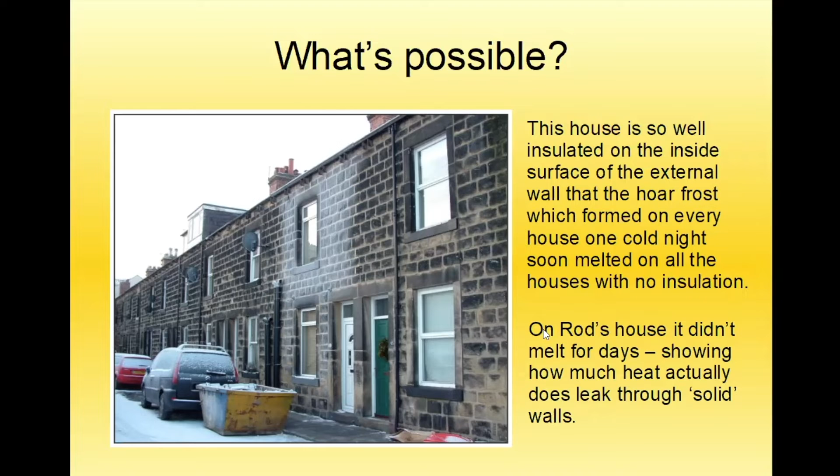Now, Rod's house is really quite special. I'm going to give you some things about it. It's warm and comfy all the year round. I remember going into his house one December, very cold. I said, oh, it's lovely in here. When did you last have the heating on, Rod? And you could see him thinking for a moment, oh, I think it was 3 days ago.

And he just doesn't need to heat it. It self-heats. He has a wood-burning stove, but he rarely puts it on. Doesn't need it. The house just stays warm.

All his lighting, he's converted to ultra-bright LEDs, and he supplies those from a battery, which charges from a small solar panel. In actual fact, the solar panel is on the north-facing part of his garden shed. And because it's amorphous silicon as opposed to monocrystalline silicon, it's still working in cloudy skies.

And this dominance of monocrystalline silicon is a puzzle. Here we are in cloudy northern Europe. Now this fellow had the gas turned off to his house 20 years ago. No gas bills. And he showed me his mains electricity bill for the whole of one year: £40.

Now I get very, very excited when I see this kind of thing. Imagine what we could do to fuel policy. Imagine what we could do to carbon emissions. And this is a 100-year-old house.

Okay, well, slight introduction of who I am, how I got here. Around 2008, I started a community group in that town actually - that's Otley, just north of Leeds - and it struck me that we needed a forum, we needed a place where we could talk about it and get people thinking, get people understanding what was possible.

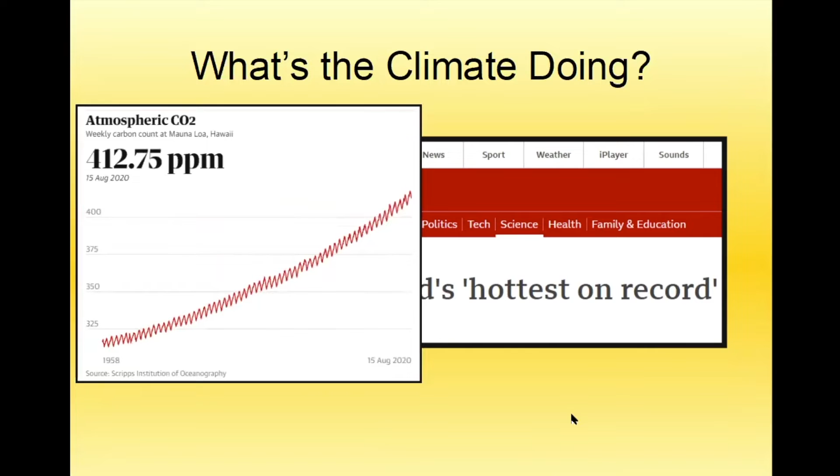So what's the climate doing? Well, it's getting hotter. September this year was the world's hottest ever. Atmospheric carbon is a key driver for that, and we can see a very close tracking of the global temperature rise. On the right-hand side of this image, the bar at the bottom represents the same time scale as the carbon dioxide graph on the left, and they're just tracking each other.

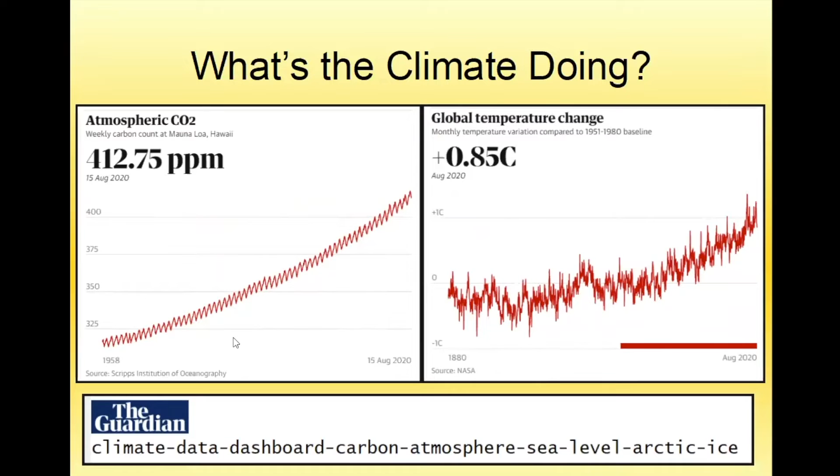This is where the data came from for those two graphs. We're all very familiar with a lot of the extreme weather events. This is one of the big drivers for doing this work, and it's one of the reasons that I'm so passionate about being involved with it all.

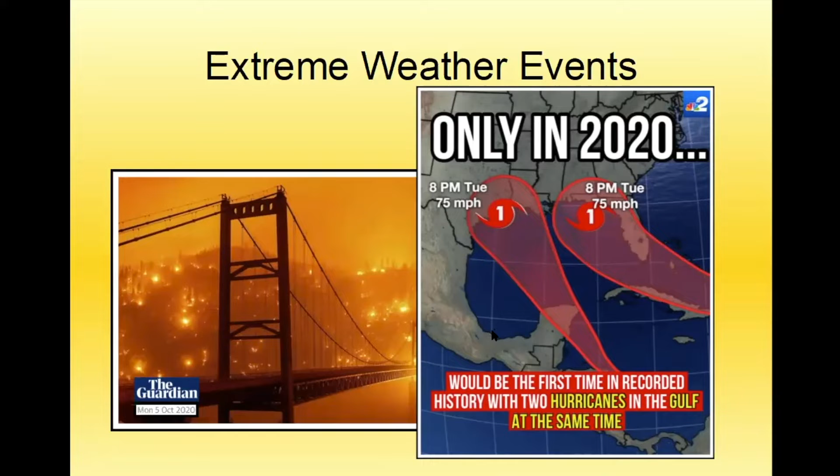Horrendous fires in California and Australia and many other places. This year, there were two hurricanes at the same time - that's never happened before, which is really kind of scary. But you don't have to go far. The Lake District has had huge amounts of rain, and it's just making a proper mess. In Yorkshire, we had a huge moor fire, and it destroyed a lot of natural countryside and wildlife. And then last August, there was a tornado.

So now I'm going to show you a little video.

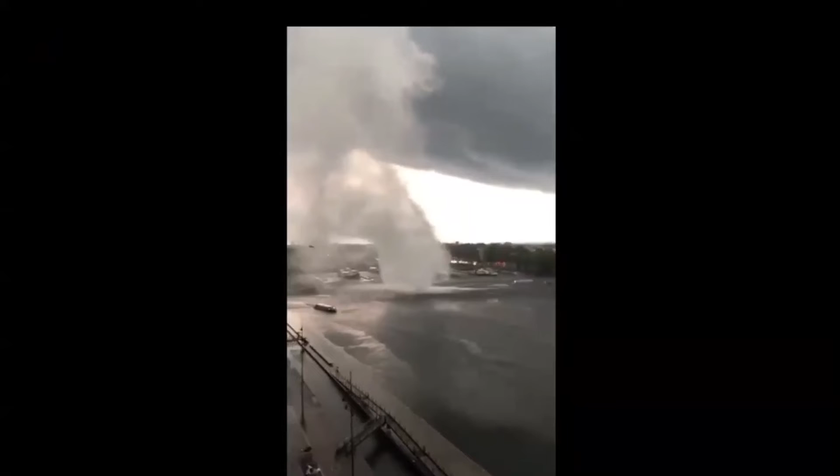I always thought that tornadoes happened in Texas or over there, not Amsterdam. That's getting a bit close, if you ask me.

Fuel poverty is a dreadful thing. I've been following this very closely, and there are different definitions of it, but essentially it's where households are below the poverty line and, within certain constraints, spending more than 10% of their remaining income on fuel. And of course, a lot of them are having to choose between eating or heating. This is a social scourge. So even with the best manipulated figures from the blessed UK government, that's 2.5 million households living in fuel poverty - more than 10% of the entire population.

This is 2020. When you start looking at older properties, it's actually 18% of the population in older properties. In private rented properties it's 21%, and astonishingly, lone parents with children have got the worst deal of all.

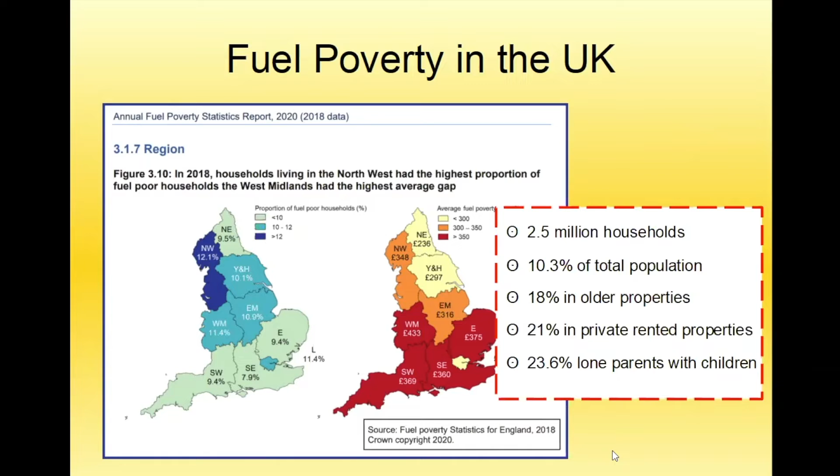What can be achieved? Well, here's a very rough graph of the amount of energy used for an average house. So I'm saying it's about 15,000 kilowatt hours for an average house, and that's gas and electric combined.

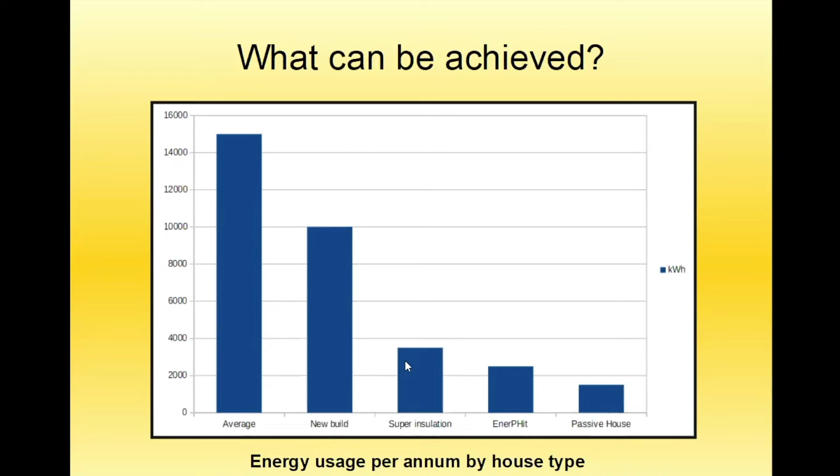Where would we like to be? Passive house, which I've pegged at one tenth of what the average is, so about 1,500 kilowatt hours for the year. A new build house, maybe 10,000 if you're lucky. These are just general figures. Super insulation, I feel you can comfortably get down to about here. EnerPHit is a standard similar to passive house with a few things relaxed. But this is the kind of step change that we need if we're going to make a big difference.

So insulating the UK housing stock, starting with local initiatives like in the Borders, what would it give us? Well, it would create tens of thousands of jobs. It would stimulate the whole manufacturing industry and the supply chain, improve the health and well-being of an awful lot of people, and that would reduce the burden on the NHS. And that can be quantified in terms of social return on investment.

It would build community involvement. It's a well-researched fact that if you put money into a neighbourhood, then everybody pulls their socks up a bit and starts to work together. If people aren't paying horrendous fuel bills, there's clearly more money to put into the local economy. Of course, it's going to reduce carbon emissions, and it's also going to improve the UK's fuel security.

80% of the gas we use now, I've read, is imported, and that's fine whilst Russia or Norway still want to sell it to us.

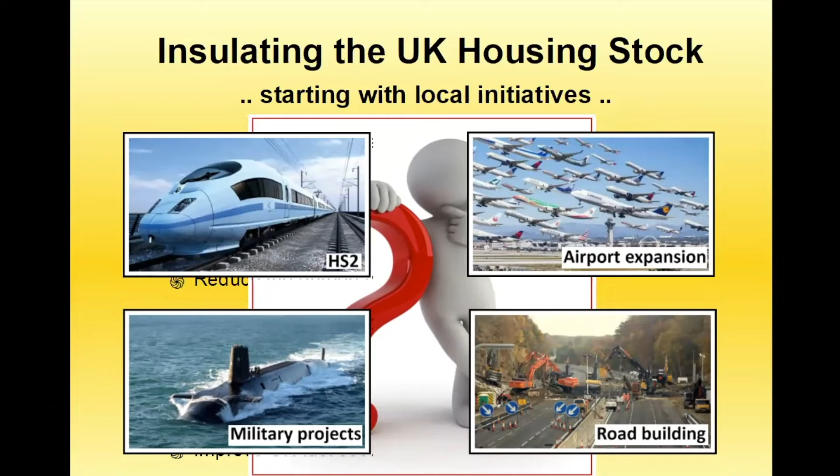So hang on, if there are so many good things, why isn't it one of the biggest national priorities above everything else? You can choose your own capital project that we could get rid of to fund this kind of stuff. Now, clearly there's some government policy change needed, and an estimate I've made is 200 billion to fix all of the housing stock, not the drop in the ocean 2 billion being currently offered. Now, that might sound like a lot of money, but they seem to find it if they're mates with an airline or a bank seems to be going broke, so that's not too hard.

So I do encourage people to write to your MPs and councillors. What I hear back is that the politicians don't hear that climate change is a problem. They don't hear that fixing homes should be a priority for them.

So we're going to try another case study now. Well, I've lived here for a few years now. It's a great house, but it's just a bit cold and drafty.

Now Lucy's moved in, she's noticed how hard it is to keep warm, especially in the evenings. The only way we can get the room up to a good temperature is to put the fan heater on full blast. Or wear jumpers, or both. And as soon as we switch off the heater, the room gets cold really quickly. And sometimes when we have our friends over, some of them don't even bother to take their coats off, it's that cold.

It was my dad who told me about solid wall insulation. So I opted for insulating the outer walls and under the floorboards, that will be a bit warmer this winter, and we'll save some money on our fuel bills, which were pretty high last year.

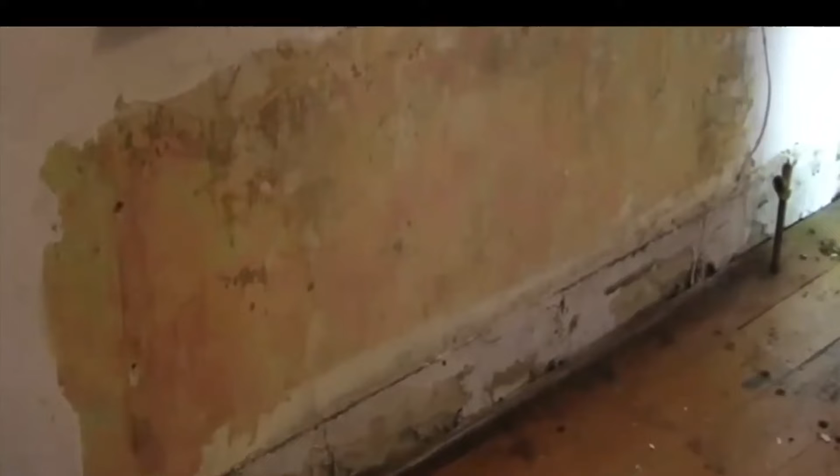When I did the energy review of this house, I found in the front room that there were two major problems. The first was that there's a lot of cold air blowing in around the floorboards and through the cracks between the boards. And the second was that there were some big cold surfaces making people in the room lose heat very quickly. The floor was the first thing to tackle.

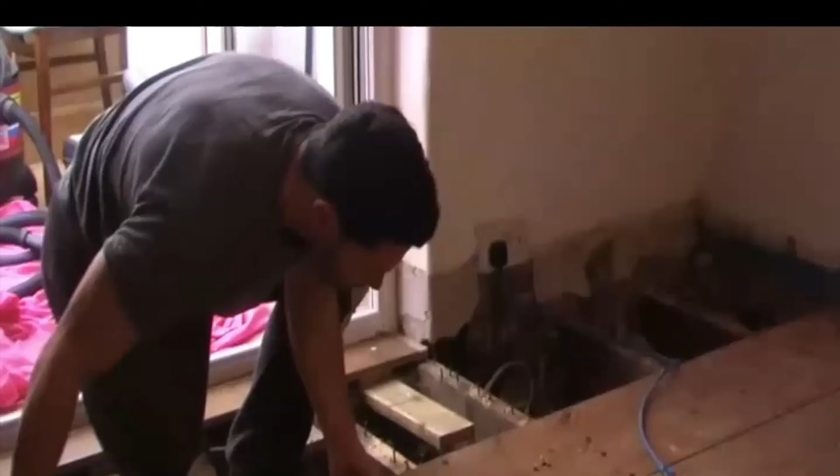Now, because it was stripped pine flooring, we wanted to keep the floor, so we have a special technique for lifting the boards without damaging them, and then under the floor we laid a very thick layer of mineral wool to insulate the floor, and also did the pipes whilst we were at it.

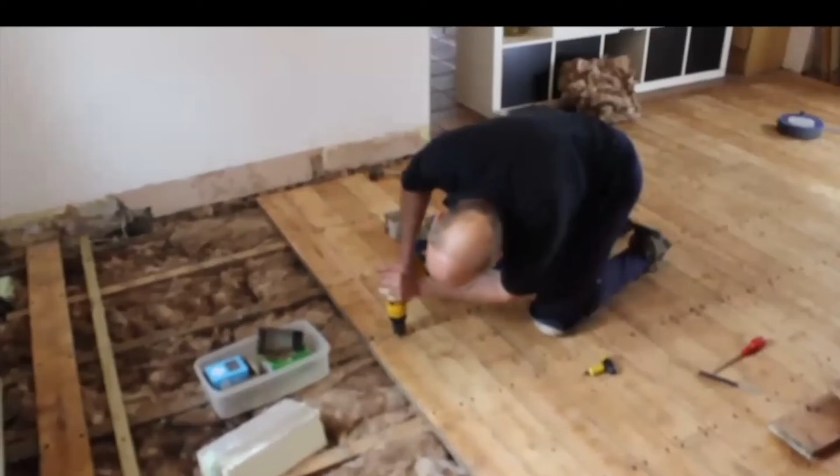Relaying the floor, we were able to recreate the look of the pine flooring to retain the feel of the original room. For the walls, we stripped off the woodwork and the electrics and attached high specification insulation board, then finished it off with plasterboard ready for decoration. The whole room is now at least 10 times better in terms of energy efficiency, and that will definitely make the room feel warmer. But I'm happy for Joe and Lucy to say how they feel when winter comes.

Since we've had the work done, the house just feels so warm, and when we turn the heating on as well, the house seems to retain the heat, which is great. Yeah, and we've also noticed that the energy bills have come down quite a bit as well, which is just great all round really.

Okay, so heat loss from a building. Can we just nod if you can see a house with arrows on it? Yeah, okay thank you. So these are the typical numbers of heat loss from a building. 15% through the floors, which surprises some people. 35% through the walls - in fact with an older property this could be as high as 45%. And then these other numbers in terms of windows, drafts, and through the roof.

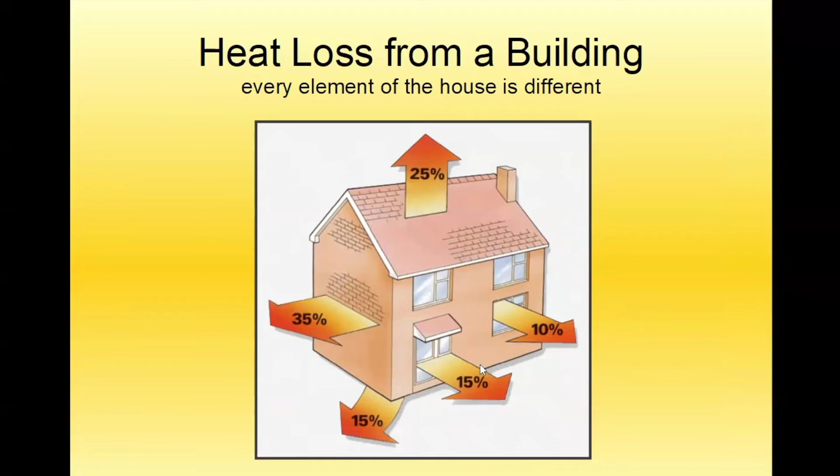So I just want to spend a very short moment explaining U values, because it's so critical to understanding how a house works, or quantifying how a house works, and then understanding what insulation types and choices we can make would flow from it.

So it applies to any surface. We could take a square meter of wall here. Let's say the U value is 5. It's got a 1 degree C temperature difference across it, so 0 degrees C outside, 1 degree C inside. The 5 there means that 5 watts of energy is permanently flowing through the surface. If we take the same square meter of wall but increase the room temperature to 20 degrees C, everything else being the same, we're now losing 100 watts through that 1 square meter wall.

And if we take a more typical external wall of a room, which we're going to say is about 10 square meters, we're actually going to be losing 1,000 watts through this space. Now, in that room there will be losses through the other surfaces - the floor, the walls at either side, and the ceiling. But for the time we want to sit in there and maintain this temperature, we have to pour 1,000 watts of energy into that room to balance what's being lost through that 10 square meters of wall. And if we don't put this amount of energy in, the temperature will fall.

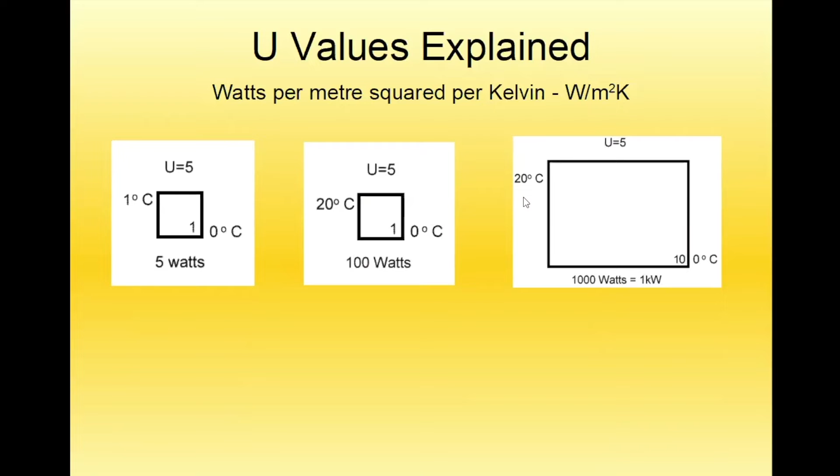And as Joe and Lucy said, they notice in their house that as soon as you turn the heat off, the temperature plummets. So a 1 kilowatt fire, something like this, would be what you need running the whole time just to balance the losses from the room.

So if we insulate it with 100 millimeters of PIR, or Kingspan is a brand name, the U value would drop to 0.25. With 1 degree C temperature difference, we're now down to only 0.25 watts flowing through that 1 square meter. As we go up to 20 degrees C, we're now up to 5 watts, and for the 10 square meter wall, it's only 50 watts.

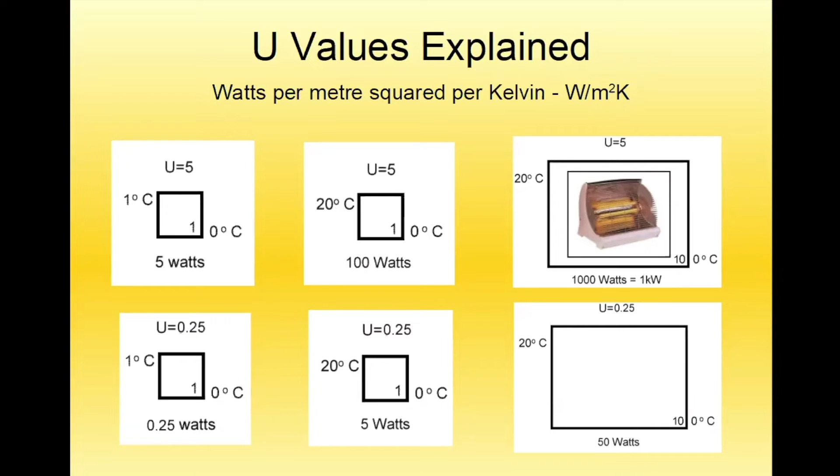Now, each of us sitting here in our homes watching this presentation are generating about 100 watts. And that's why insulation works - that's why it's so important to get a really good layer of insulation to keep the heat within the house. So one person would be enough to generate about 50 watts, or indeed 3 cats.

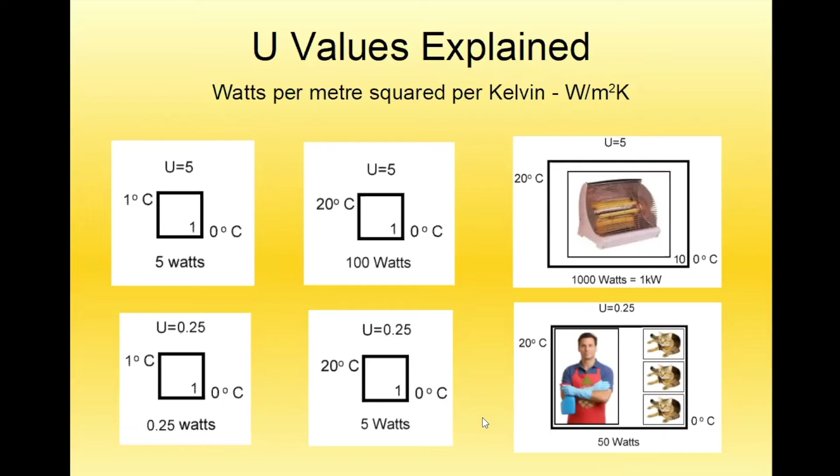Now, this kind of fire - I don't know if you remember these. I grew up with these. Perhaps several of you on this webinar are too young to remember those. But who on earth would still use those kind of things? Well, here's a photo from a newspaper only a few years ago, and here's the Queen, surrounded by millions of pounds worth of priceless artwork. And how is she heating the room? Well, it's with a 2-bar electric fire. So there are some people still using these, I think.

Okay, to give you some context, some kind of scope of what U values we can expect within housing: a stone-built house is somewhere between 4 to 10, roughly 4, but it could be as high as 10.

And you've got cold air blowing into the house as well. A brick-built house, somewhere in the region of 1.5 to maybe up to 5 - a lot of variation here. Depends on the construction style, the material that's been used, and so on. Where would we like to be on all of this journey in retrofit?

This is something called the passive house. At this point, the typical surfaces have a U value of around 0.1. The closer we can get to 0.1 in all of our work, the better we can control the environment, and the less energy we're going to need to create a comfortable living space.

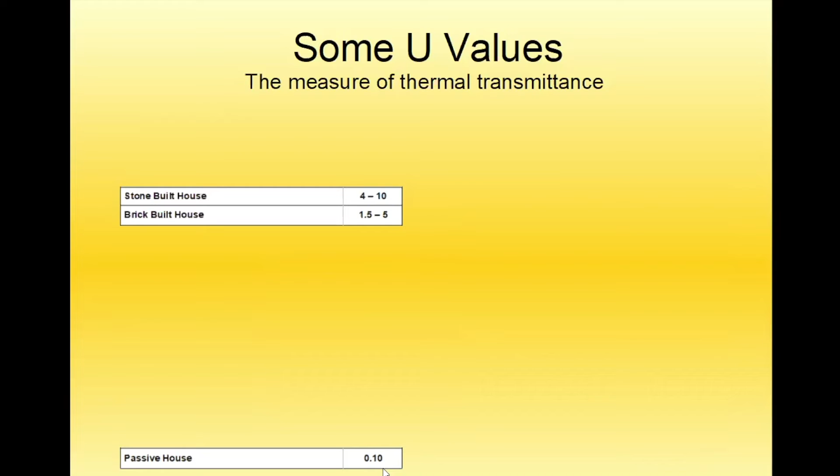What often happens is that people will put cavity wall insulation in, but that's only going to give you a U value of 0.7 to 0.9 - not actually that much better than what we had before. In fact, cavity wall insulation can cause an awful lot of problems on its own, including damp tracking coming from the outer leaf through into the inner leaf.

There's a number of traditional builders that are just happy to stick a very small 50 millimeters, 2 inches or so, of Kingspan onto the external walls and call it done. But in actual fact, the U value again is nowhere near what our ambitious design target is.

All right, well what else could we do? We've got some choices - start from the bottom here. 100 millimeters of Kingspan will give us a U value of about 0.24, 0.25, something in that region.

For polystyrene, you need twice the thickness. Mineral wool, you need twice the thickness to get the same amount of thermal performance. And because mineral wool doesn't hang very well on walls, it's far better to use in horizontal surfaces - underneath the floor and in attic spaces. As a matter of fact, my design principle is to use 400 millimeters of mineral wool in the attic and under a floor with a rather clever suspension system I've come up with. At that point, you're getting a U value down to 0.1.

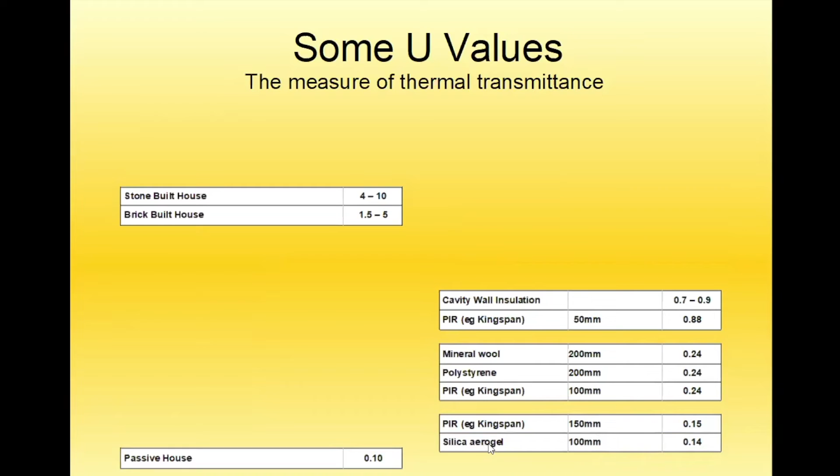There's only one, and it's silica aerogel. This is a NASA material, and yes, you can use less material of this type of stuff to give you the same thermal performance, but it's 10 times the price. So it's just not feasible for any kind of wide-scale retrofit.

Let's look at windows. Single glazed window is 5 - that's an awful lot of heat. What surprised me when I first saw this is that a double glazed window with air in the cavity, so any window older than 7 or 8 years old, the range of U values is somewhere here, 2.6, 2.8, 2.9. That's very high. So if you've got a house with several square meters of glasswork, that's hundreds of watts flowing out through those windows.

Now, very often, a double glazed window with argon filled is twice as good. I often recommend to my customers that if your frame is in good nick, then it could well be possible to just change the glass units, and that would halve the energy being lost through those windows.

Now, if you are in a position to replace the frame altogether, and there's some very good reasons why that might be necessary - let's say it's a very old timber frame that's reached end of life, or it's an aluminium frame which is clearly conducting a lot of heat out - and you're trying to choose between a double glazed argon filled window or a triple glazed argon filled window: in fact, the increasing cost of choosing triple glaze is only 25% more. So if you've got the budget, you could have a window which is twice as good.

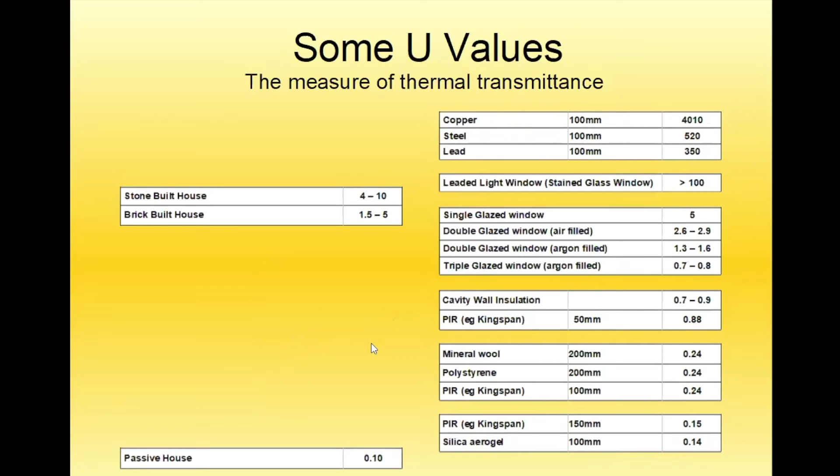I just wanted to do that so that you've got this picture of this range of U values, because it's absolutely critical to have that in your mind, and I think that could be taught a great deal more, so that all of our tradespeople could have that picture in their mind.

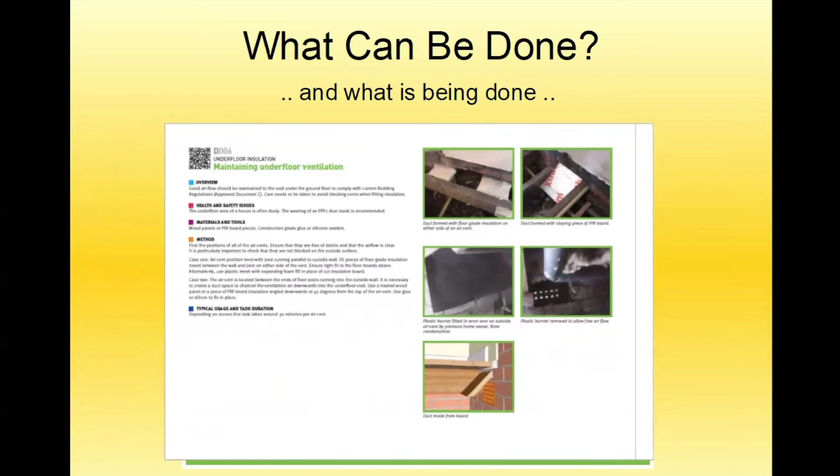So what can be done? What's being done? Here's a guidance manual that I wrote the central part of. As I talk about this, some of the pages of this manual are going to slide across the screen. This is for a local housing association, Leeds Action to Create Homes, and this is a set of step-by-step guides. All these photos are case studies from work that I've done. This is how you do it, what the safety implications are, what the methods are, what you've got to be thinking about, and so on.

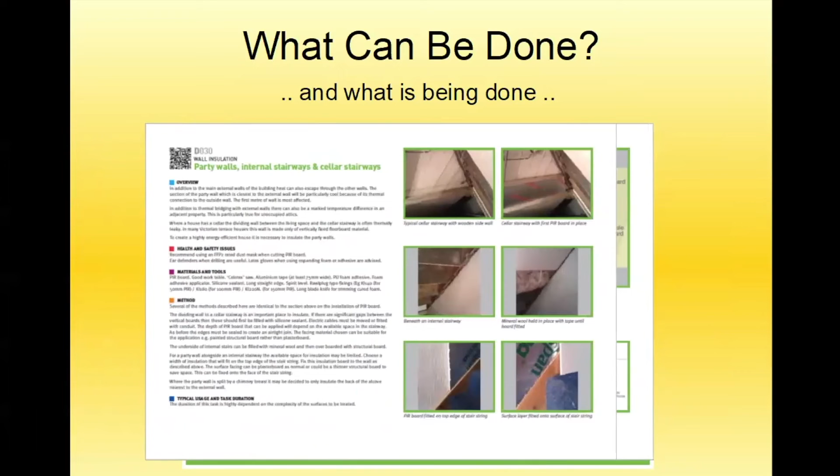This is now in use by 4 housing associations, I think, in Leeds, in current use, and it gives you a kind of a toolkit of what you can use. These are some of the organisations I've worked with, and this is available for free.

Another place to get information from is this WordPress, this blog with a customer who's now a friend of mine. Insulatingmyhouse.wordpress.com, and that's very, very nicely written. It's got quite a humorous tone in it, and it really shows what's possible. And he is actually approaching passive house in his mid-terrace house.

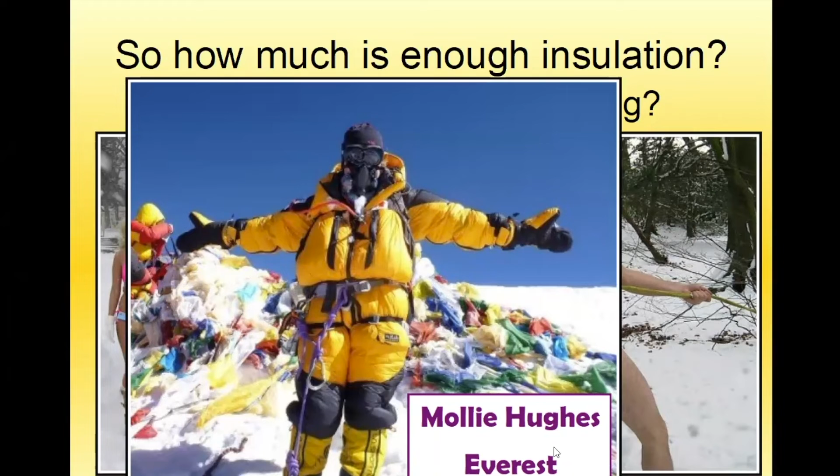So how much is enough insulation? Is anything better than nothing? Well, I would suggest not. Here we've got some people in very cold environments, and they're wearing something, but is it enough? And the answer is no, of course not. What you need is an appropriate amount of insulation to keep human bodies warm. This is the very remarkable Mollie Hughes, who's a British woman who's climbed Everest by 2 different routes. So well done her, and she's got the right amount of clothing on.

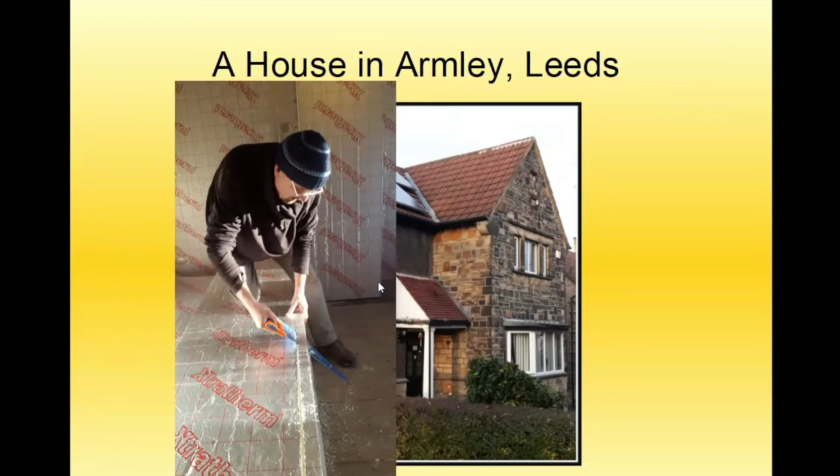Case study. This is a house in Armley in Leeds. Here it is, it's got solar panels. Now, I was asked to come and design something for this room up here. So it's actually got 3 external walls, as you see. It turned out to be really, really cold, so they couldn't even use the house. It also has a sloping element of the ceiling. So you can see here, shaping a piece of the insulation board, and this is where it gets fitted up.

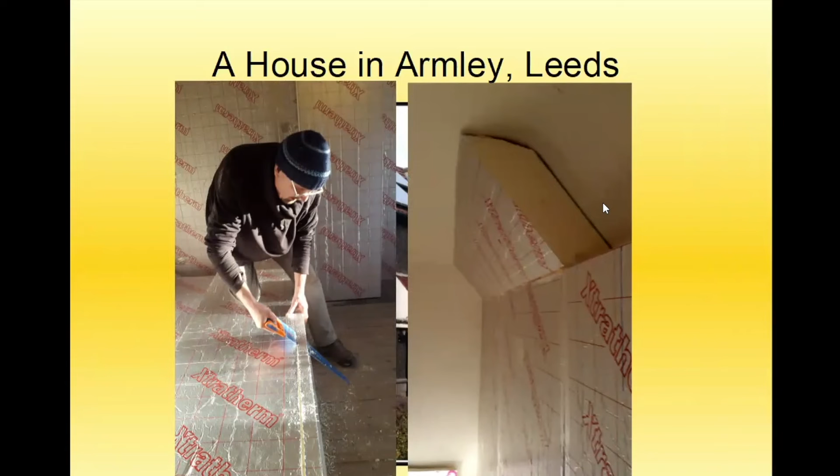On the sloping part of the roof, which apparently in Cornwall they call a skeeling, and I'm going to bring that word back into use. I think I quite like that word.

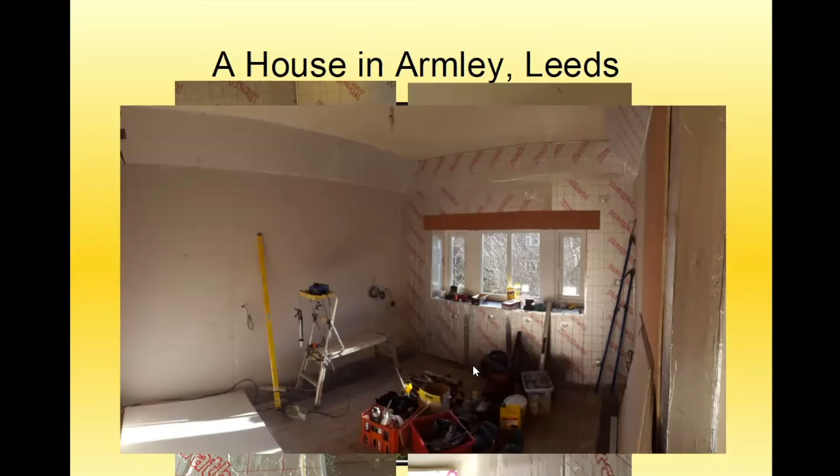So here's a kind of a wider shot of the whole of the work environment. You can see the sloping elements here, the vertical. So my design here put 150 millimeters on all of these surfaces, and then you just be pragmatic as you come into the window reveals here, just to return it. But it's got to be continuous, and you've got to have an airtight vapor barrier. It also goes below the floor level and around the joists that are sitting in the wall. I'm going to come back to that in a moment.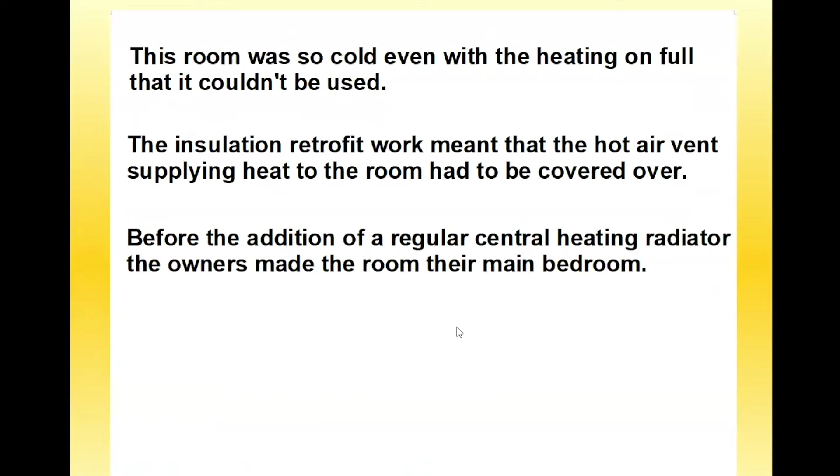So this room was so cold that even with the heating on, it couldn't be used. Now, as it turned out, my design called for insulating up the wall where the hot air vent was, supplying heat in the room. And so the lady of the house was really quite concerned that this wasn't going to make her room warmer, since I was going to cover the vent up. The big plan was to put a wet central heating system in the near future. But anyway, before they put this central heating radiator in, they made it their main bedroom. And they found that just with 2 people in there and the bedside lights on, the room stayed at a comfortable temperature. In fact, they now tell me it's the warmest room in the house.

And that's what's possible if you super insulate and pay attention to detail at the install stage. Okay, so air tightness is absolutely crucial.

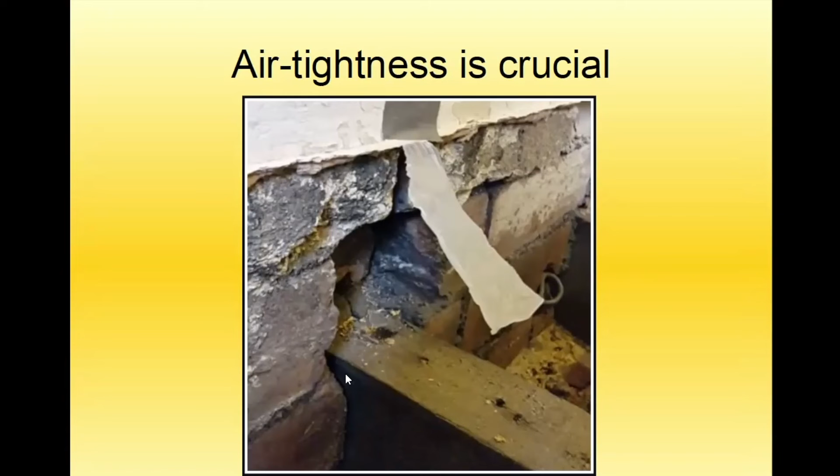One of the things that gets forgotten by many traditional builders is that where the joists sit into these loose sockets in the inner leaf, you've got a lot of cold air blowing in through this junction. There's always moving air in a cavity. It's not understood as part of the building physics very often, but really this moving air is cooling the inner leaf and blowing around the joist into the heart of the house. This is one of the areas we've really got to fix.

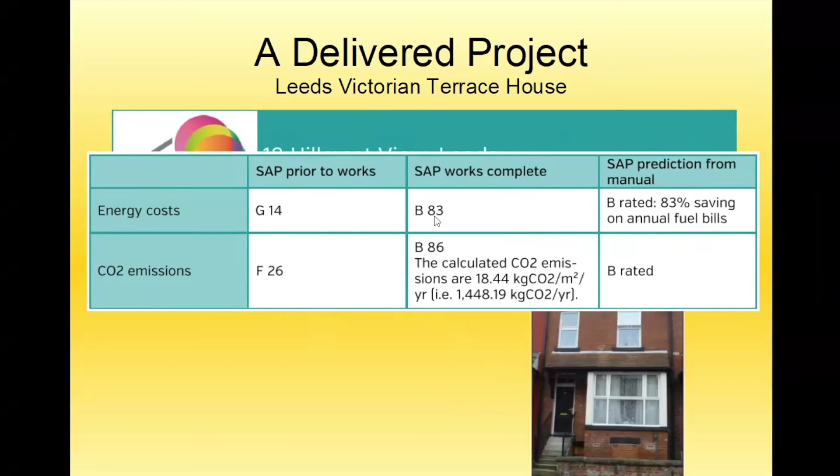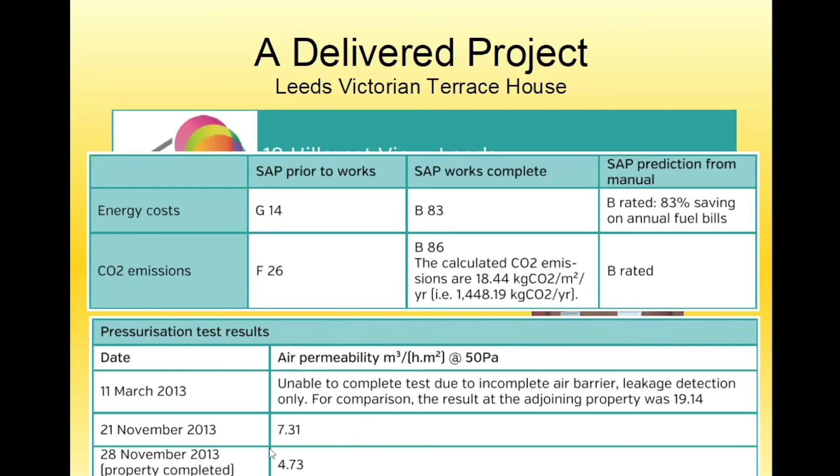So here's another delivered project. It's in Leeds, this is with Latch. Here's the building we're working with. In terms of the SAP calculations, beforehand it started as a G, when we'd finished it calculated as B83. That'll do. In terms of air tightness, it started off so bad they couldn't even measure it, it was 20 something. The design target for Passive House is air changes of 0.6, so truly airtight. This wasn't my installation job, I designed it and dropped in, but they actually got it down to 4 and a bit. But you can do better.

Okay, so another delivered project. This is a back-to-back terraced house in Huddersfield, just south of Leeds. This started out as EPC E. I worked on this and we did a really amazing number on it. The next stage would have been to put solar panels on the roof. Had we done that, it would have got EPC A. So that's the transformation from EPC E to EPC A.

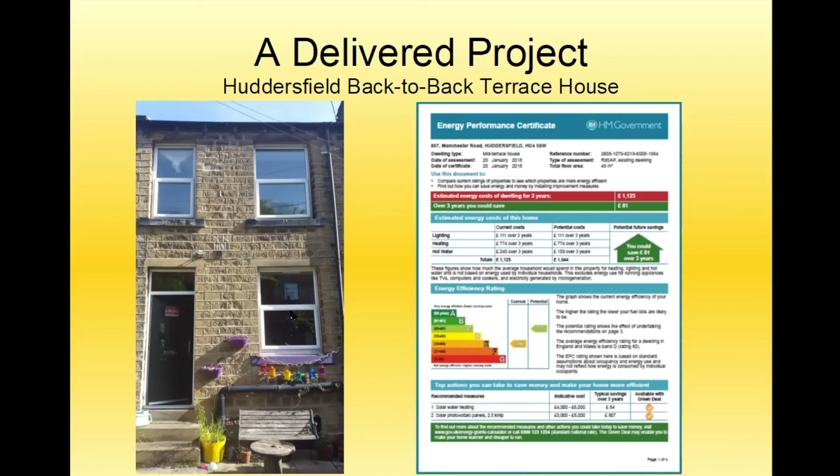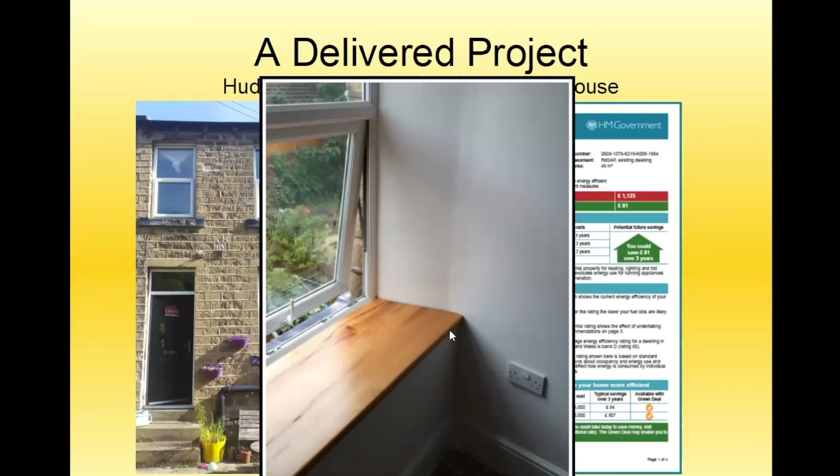And the room was just lovely, and the house was just lovely and warm all the time. One of the nice features is because the wall thickness increases so much, the window ledges can almost become window seats. What I've used here is some reclaimed pine from one of the local mills, treated to make it a bit of a decorative feature in the house.

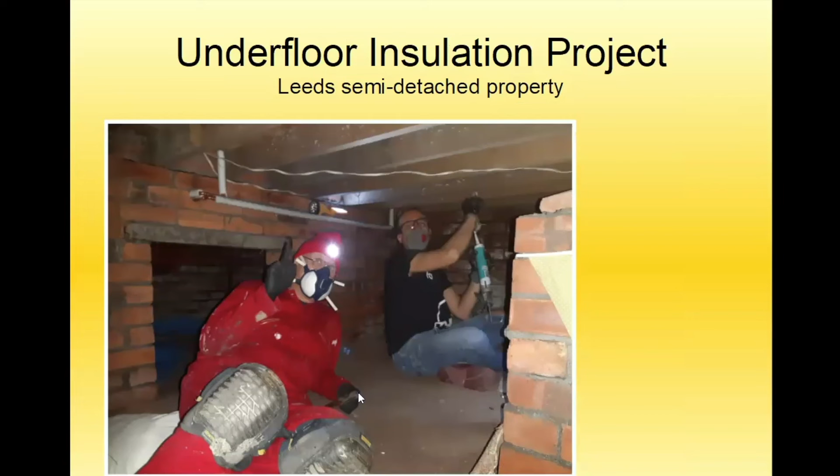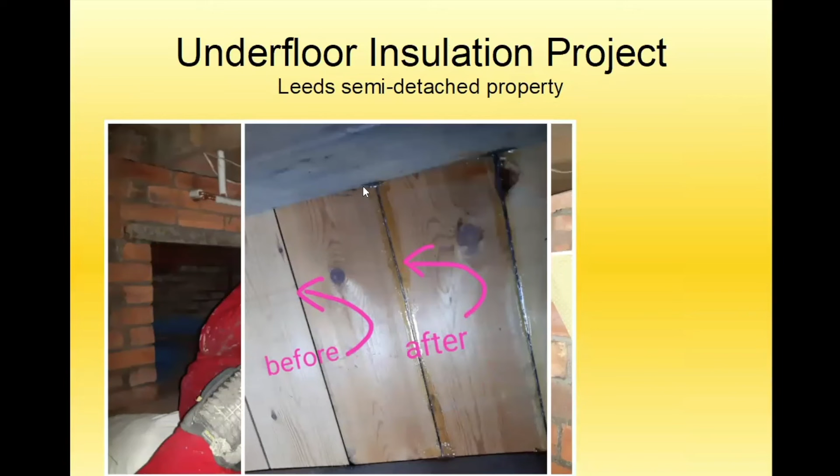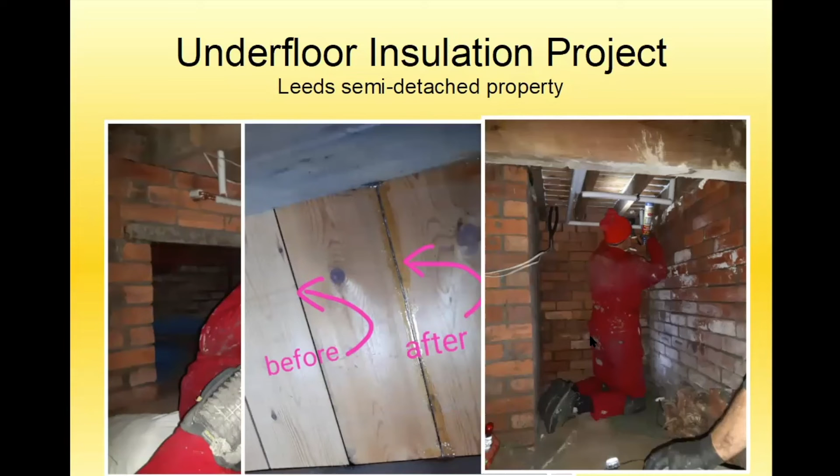So, an underfloor insulation project. Underfloors are massively important. They can involve crawling around in the dark, but it's just about having good equipment. What we're doing here is sealing all the joints between the floorboards, which are very leaky, with bathroom grade silicone sealant. We're also sealing around the edges of the room with expanding foam. The gap between the floorboards and the walls creates a huge amount of airflow from the unheated cellar. You often find some little pieces of treasure as well.

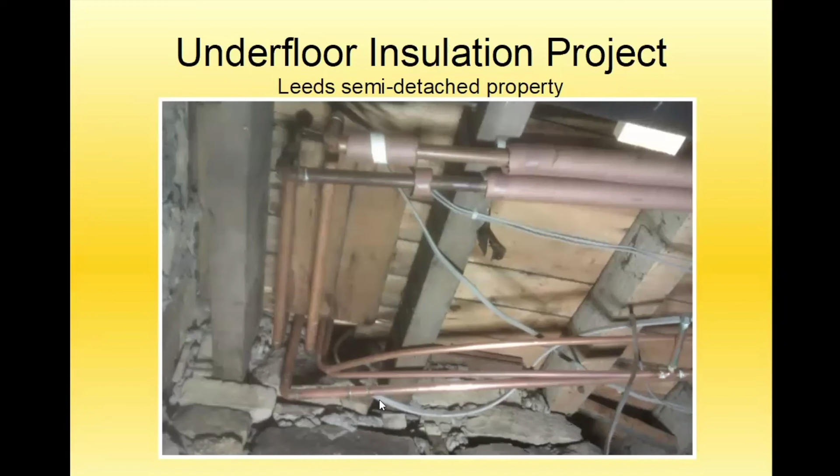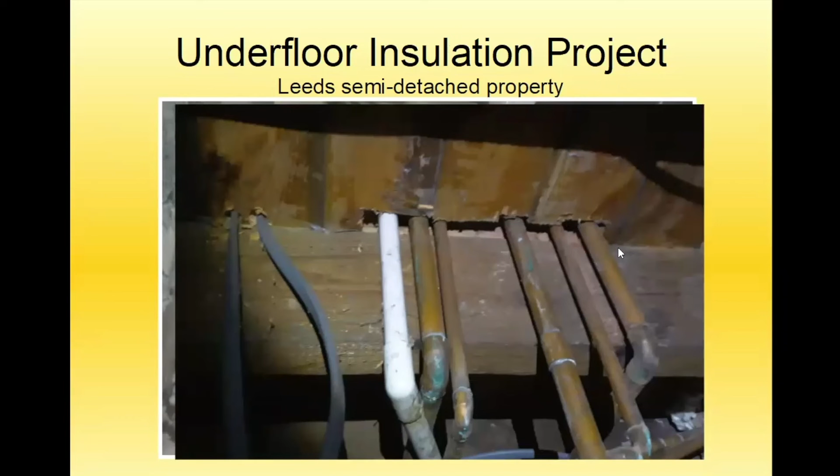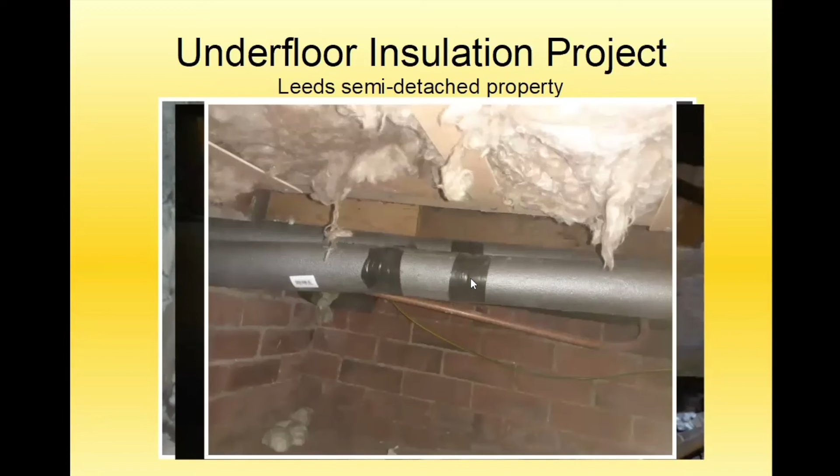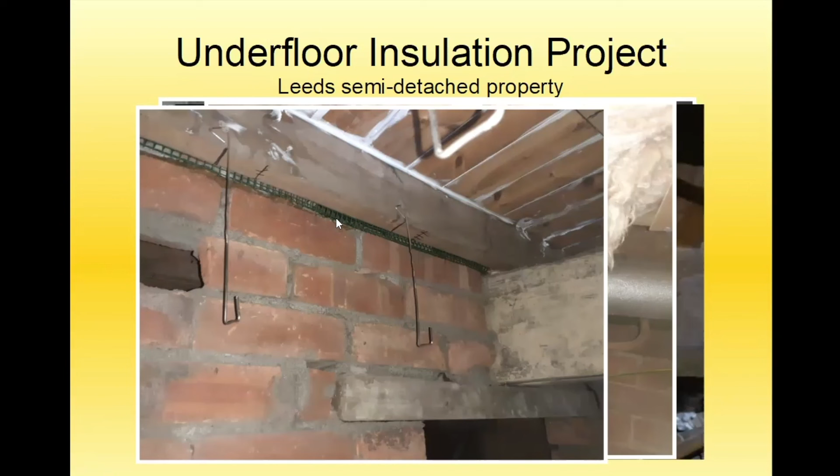Obviously we've got to insulate really very thoroughly. This is 25mm wall polyethylene tubing with all the joints taped. What we can see here is the gap between the final timber and the wall. I use this garden mesh, then squirt the expanding foam into it, not only to create air tightness, but to deep fill this whole section to get insulation as well. The mesh stops the foam dripping out before it's cured. These suspension hangers are part of my system where I get two layers of insulation, one between the joists and another parallel at right angles to the joists hung underneath.

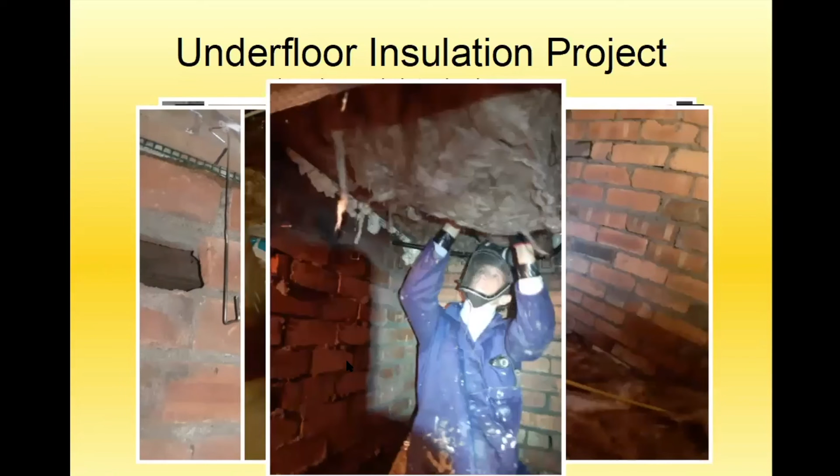Here we are measuring the mineral wool. Each of these slabs is 200mm deep. Here we are fitting it with an appropriate powered ventilation mask.

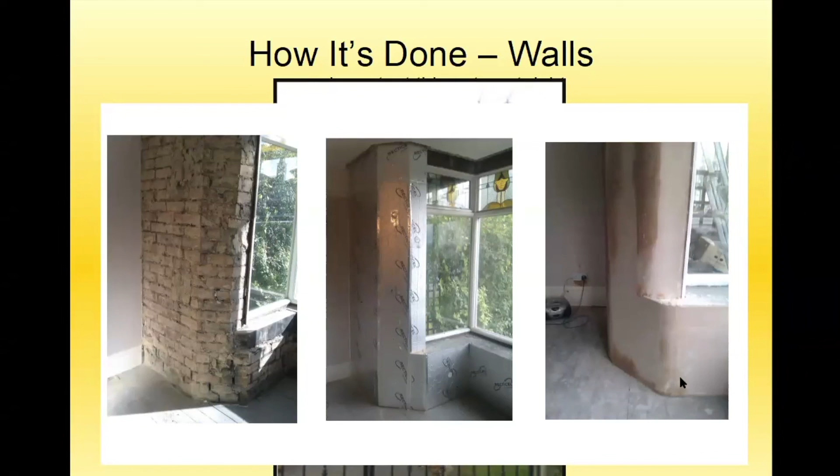Okay, so we'd start off by stripping the walls back to brickwork. It's not absolutely essential, but it means you can deal with some of the gaps and holes and missing pointing. We'll fit insulation around all of the surfaces, and you can see that everything's taped together, and we follow this interesting shape. We then plasterboard it and have it plastered to recreate these lovely curves as well.

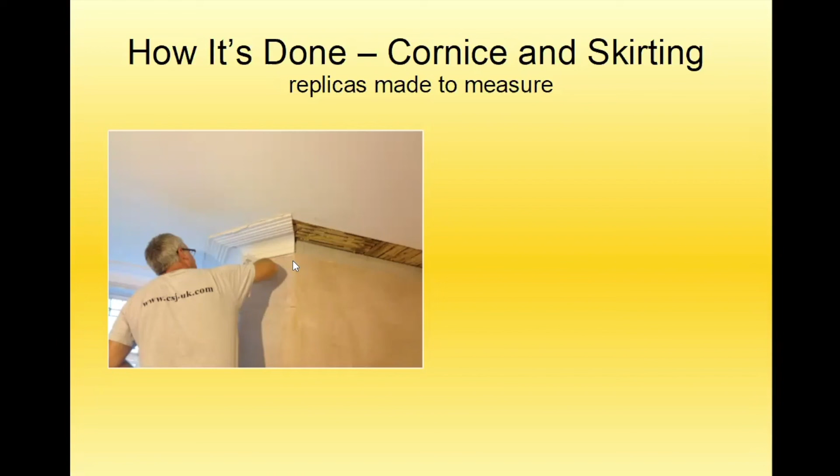Now, cornicing can be replicated, and I got this company in, again a local company, and they make a mold of exactly matching the cornicing as was, and then they come and fit it. And this is with it fitted. So this is the original, and from here on it's new. And in actual fact, this picture rail was also recreated in plaster as well.

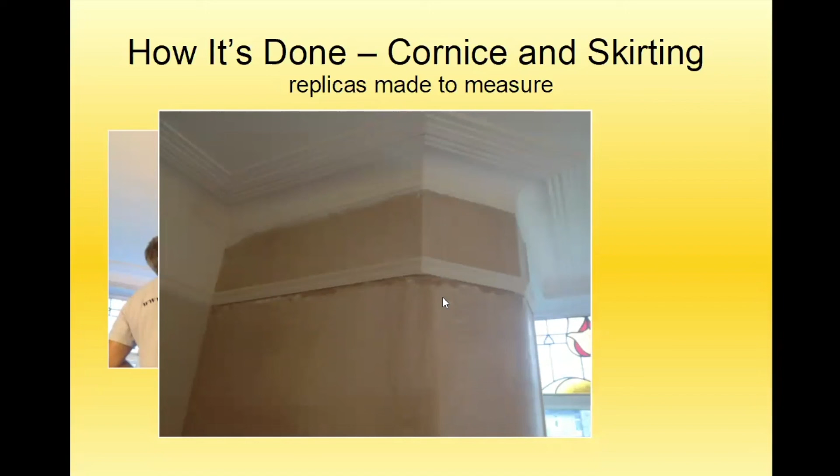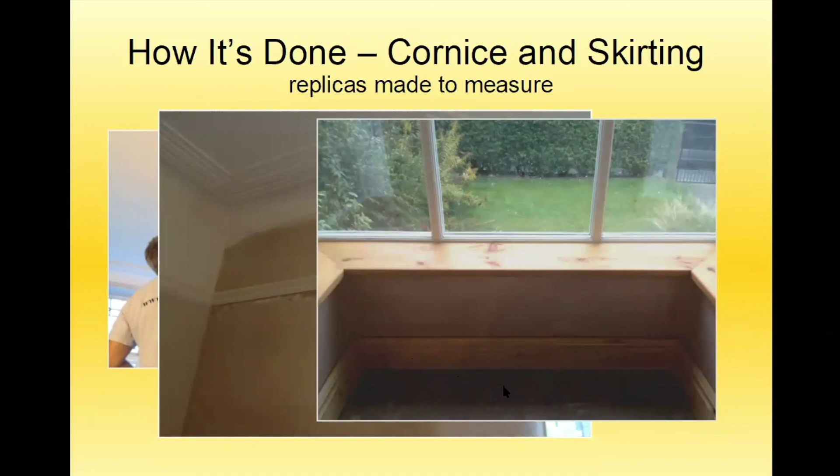For the skirt here, this is a very deep skirting board. You can't buy this kind of molding anymore, so from a sample, a different company I made a cutter, and they could run off as much of a length of the replica skirting board as you like, so you can reinstate the look and feel. And once again, I've used a very wide window ledge here. So this is the final finished. We even computer matched the color of the paint to match the original as well, with the two urchins there.

So this is the roof of my house, as was in Otley. And I'm using this amorphous silicon, which doesn't mind if it's not facing south. And back of an envelope, literally a back of an envelope sketch of how we could create very straightforwardly what you might call a critical mains circuit.

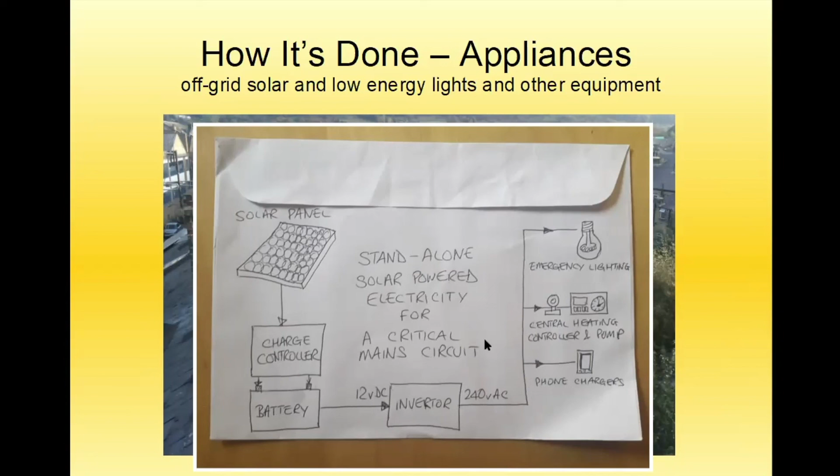So solar panel, charge controller, battery, inverter. And imagine if you then connect this mains to not only emergency lighting and phone chargers, but also the central heating controller and pump. One of the things that elderly and infirm people struggle with is if there's a mains failure in the street, then the gas central heating goes off as well. But if you could supply the electricity to keep that going, that would be a fairly easy win for health and well-being. So how's it done?

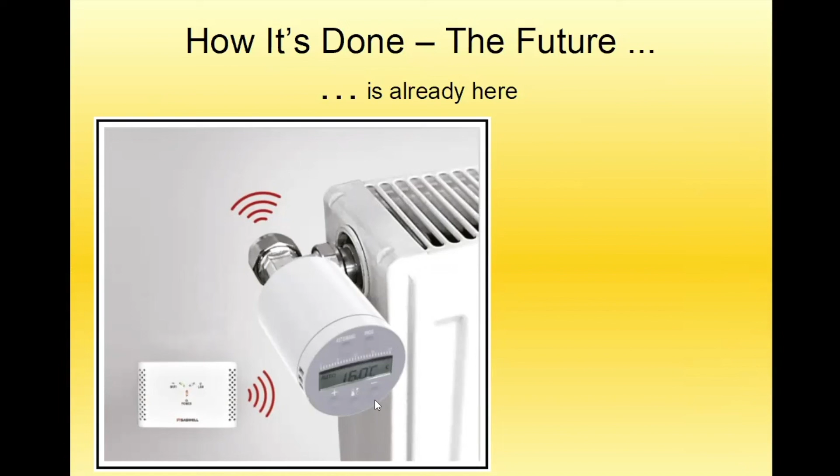The future? Well, it's already here. We've already got wirelessly controlled radiator valves. And this means that by retrofitting these, not only do we control each of the radiators within the room, but it means we can zone the house by radiator.

I'm very excited with this as a way forwards, because it involves a lot of high skills, plumbing, electrics, and so on, and it's improving the control systems on existing infrastructure. So rather than rip everything out and start again, we're just going to control it better. And I think we can make dramatic savings at relatively low cost straight away.

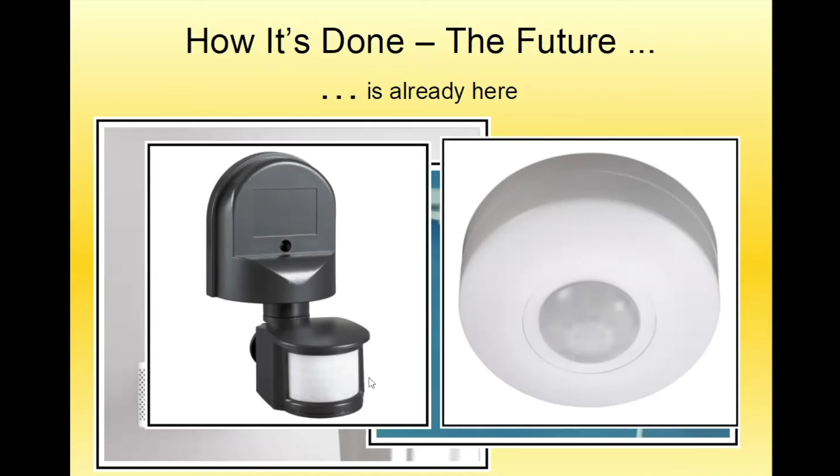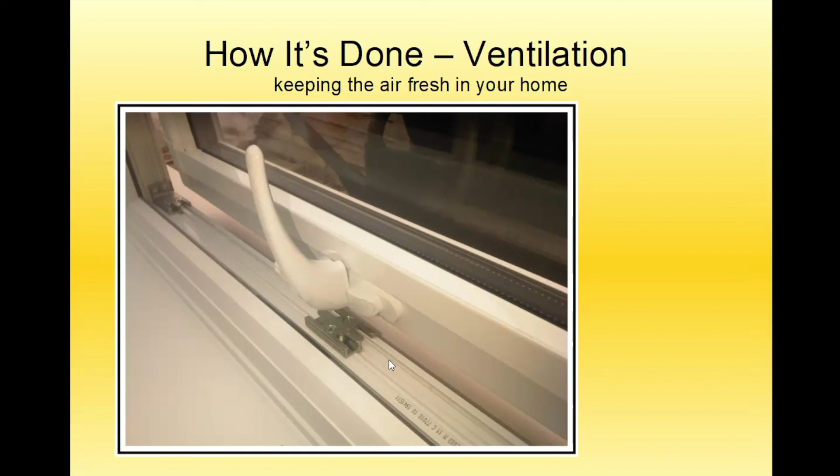Ventilation, well, you could just have the window open a bit. And in fact, in the rooms that I super insulated in my house, I did have my kitchen window just open all the time, and it never got sufficiently cold. Because you're stopping the heat loss through the walls, it's fine to have this small amount of moving air all the time. Trickle vents are very good.

I recommend those, give you an option. Once you've stopped all the drafts, you can start controlling the ventilation. The top of the range here is where you have a whole of house ventilation system, mechanical ventilation with heat recovery. And this is where you extract moist, stale air from kitchens and bathrooms. You put it through a heat exchanger, you bring in fresh air, and then you put this back into living spaces with this temperature uplift that you've harvested from within this unit.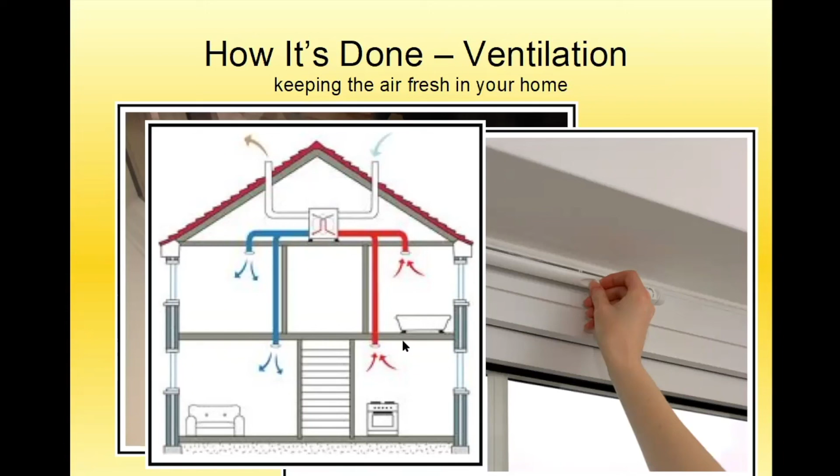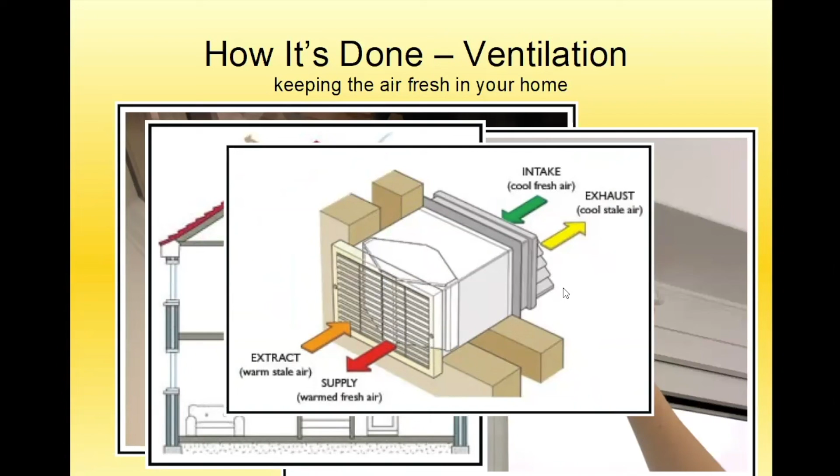Now, this is fine for a new build, but it's actually very difficult to put in as a retrofit because of all the ducting. So what we do have the option of using is individual room MVHR units, relatively inexpensive, £250 to buy the unit. It just needs a hole in the wall, a mains power supply, and it's running. Now, very often they'll be triggered by high humidity to go up to a boost setting, or you've got a pull switch to do the same sort of thing.

So my intention is to put all my energy into a new social enterprise that I'm pulling together, and this is working at a community level where people get to share skills, and we're operating for people and planet, not for personal profit. People will get paid, of course, but the kind of things that could be done by this organization are the whole house plans, retrofit coordination, where you get to oversee and properly supervise contractors, and there's some standards that have come in for that. Running community workshops, which we're already doing, monitoring the performance, and then training as well.

I invite all of you watching the webinar to join me in being part of this future. Thank you.